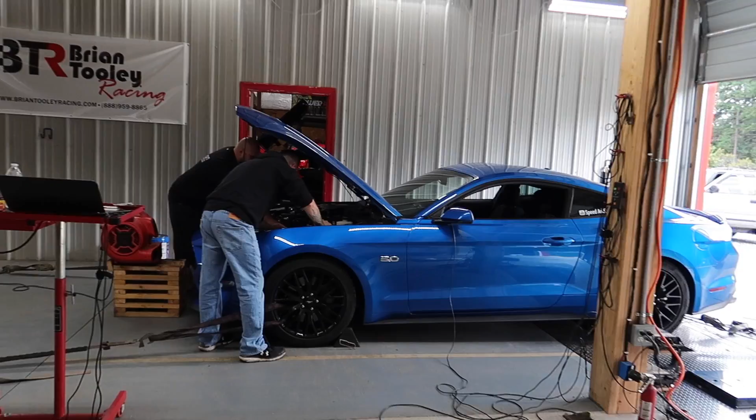We have it strapped to the dyno. I kind of left you guys in limbo in the last video with the to be continued again, but we are here at the dyno. This is actually the same day we got it running. We got the preliminary data logs done and everything's looking good. So now we've got it on the dyno, we got it strapped down, and we're getting ready to go. I'm going to change that exhaust.

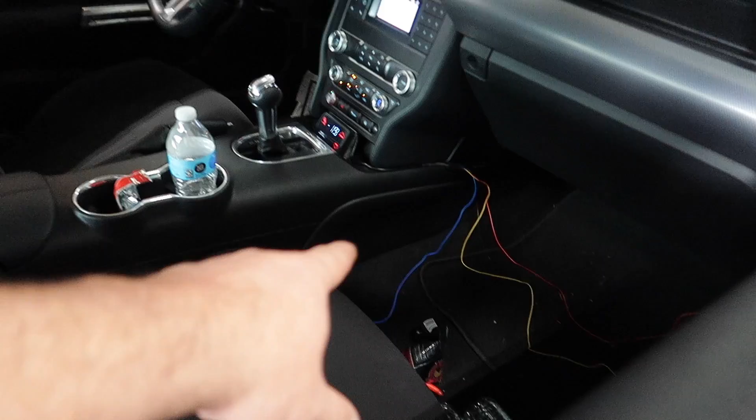As soon as I get it to the shop this week, we're going to be modifying that and moving it in, getting that taken care of. This right here is temporary, so if you see it today, I just got it wired up temporarily because I could not find a circuit add-a-fuse deal. Luckily Xander found one for me and brought it to me. Everywhere I went in Jackson I could not find one, but I got it temporarily in there so it will work, so we can do everything. We can adjust the boost today.

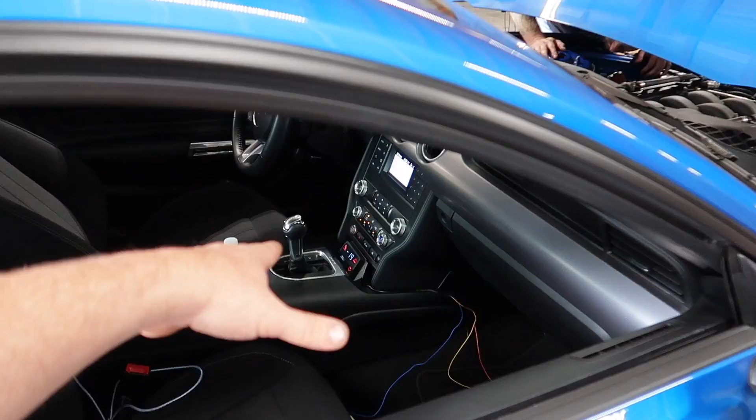All right guys, so we are about to do our first dyno pull. It's our initial dyno pull, and then Rob will take a look at it and we will adjust as we need to. This right here, I'll start the log for you, that way you ain't gotta worry about it. So I think 2500 to 6500. He only wants to go to 6500. All right guys, so we're only going to 6500. Don't expect no massive horsepower numbers. We're just filling it out. He's looking at the tune.

Do what? You want 1-to-1 gear or you want 6th gear? 6th gear. Rob said 6. Okay. This is 3.15 gears. 1-to-1, you'll be stupid mile per hour on here. Okay. Yeah.

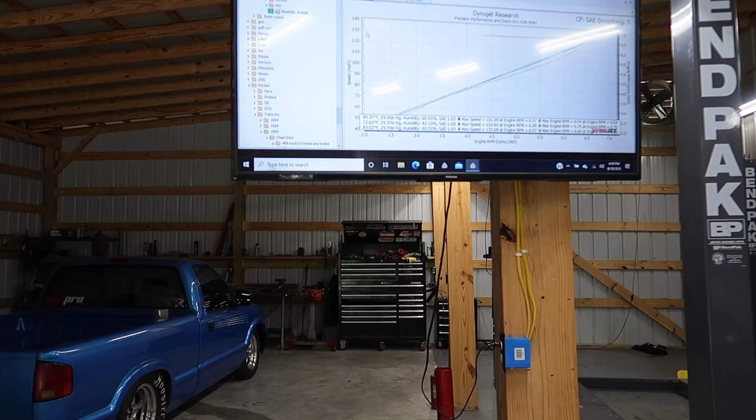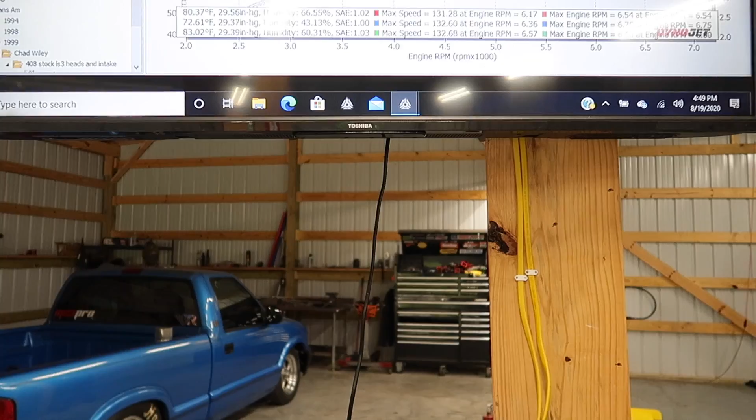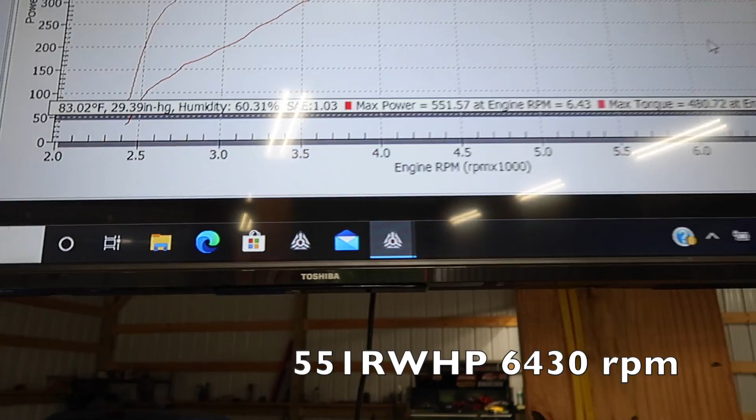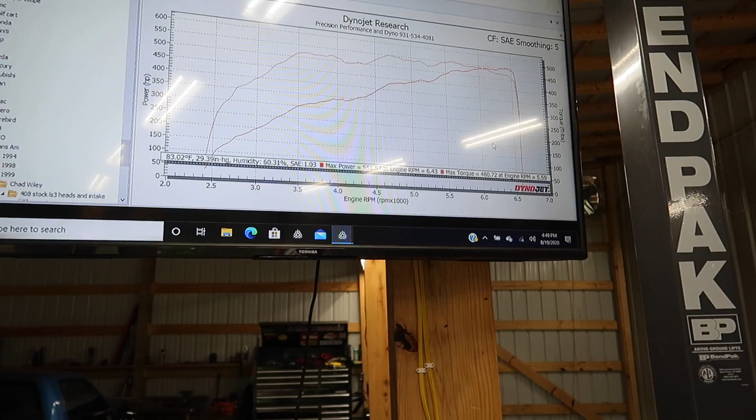Okay guys, so let's see what it does. It's doing its thing. This is a Dynojet dyno. Didn't rev out, only to 6500. 5.4 pounds. 551 and 480 torque. That's on 5.4 pounds. We gotta look at that and make sure we're good. That's not bad for 5 pounds, bro. Yeah, but we should be at 7. So it's something we gotta look at.

Alright guys, now we're going to take it to 7500. We changed some stuff in the boost controller settings. Still on wastegate, so we're going to see what it does.

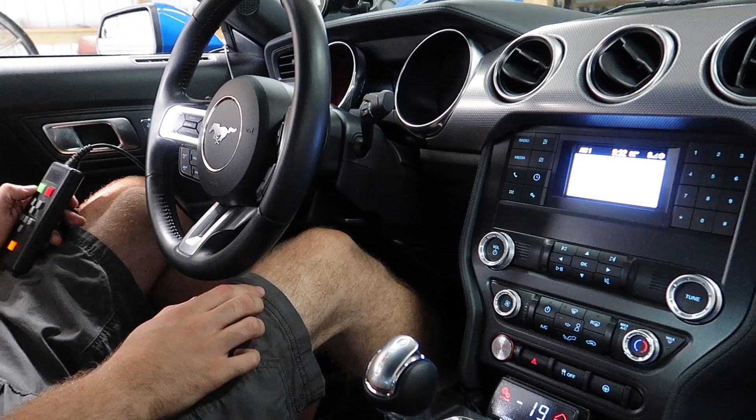What was that? Alright guys, so we're gonna jump in here and watch the boost controller. Talked to a couple people. One, the actual fabricator of the kit, and he said that what we're experiencing is pretty normal, that wastegate springs can vary and other things can vary, but the data log looked good. It was actually adding timing. So now we're gonna see exactly what it puts down. We upped the duty cycle. That was on 5.5 pounds of boost. We did 560 horsepower on 5.5 pounds of boost with 18 degrees of timing, and it was adding 2.5 degrees of timing. It was loving it. Shell 93, no additive. Yeah.

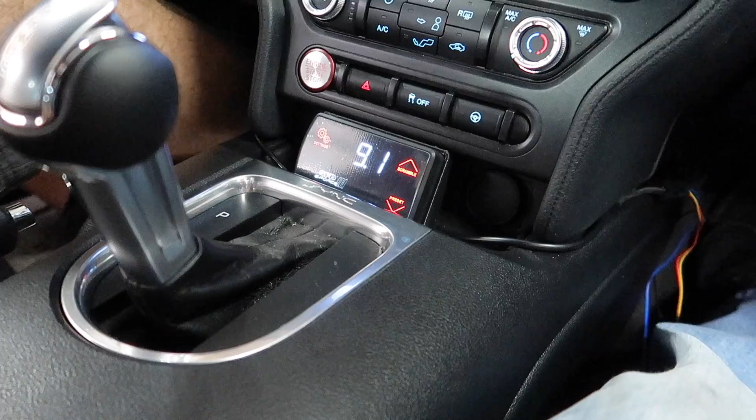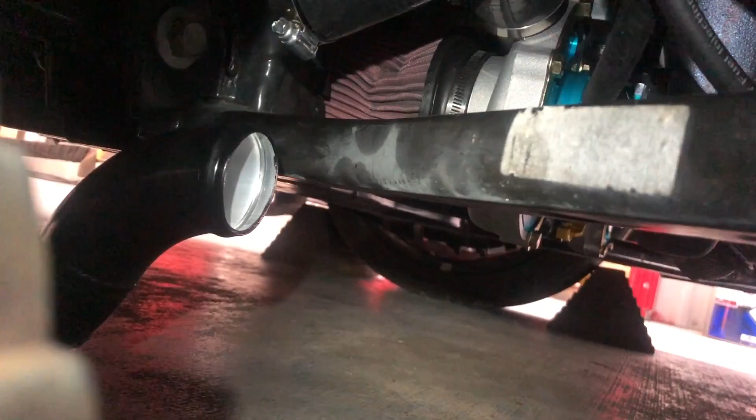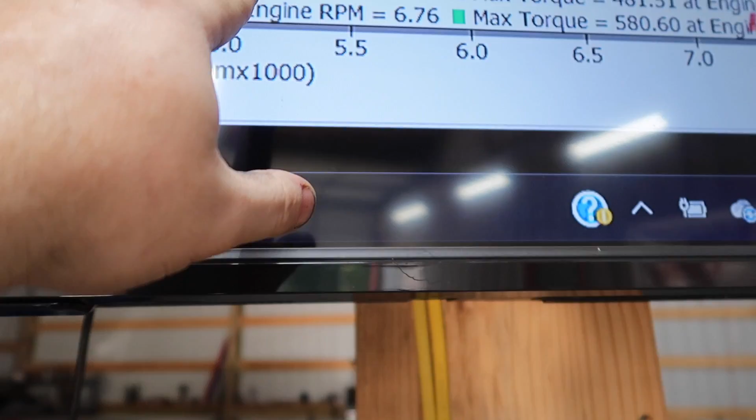We blow something off? Alright guys, so what happened that run? We hit 9.8 pounds and we blew that off. So now we're gonna fix it and then go again. I'll catch you in a minute. So that time we actually put down 686 horsepower at 6,700 RPM before we blew the coupler off. That's a little over 9 pounds of boost, 686. So we were gonna make 700 horsepower that time.

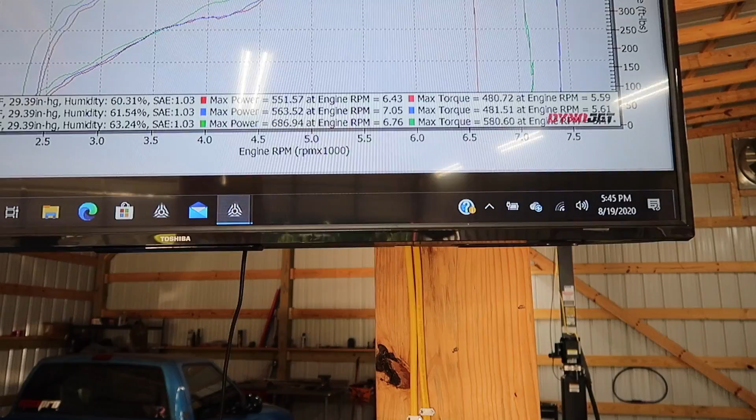So 750 and I'm good, I promise you, on 93. No. Yeah, 900 on 93. Do it. Come on, do it. Please.

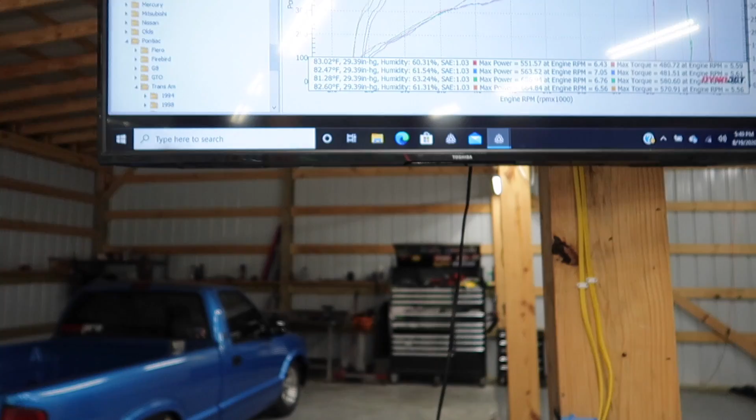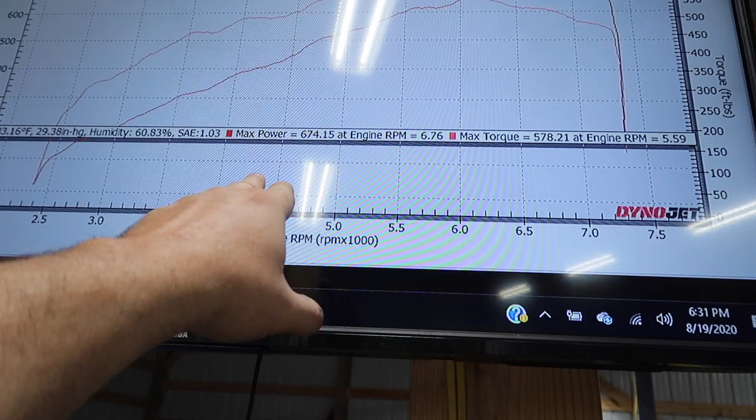All right, guys, so we're gonna make another hit. 664 at 570. So we're going to send the log to Rob. So guys, that last run we did 674, 578 torque, 9 pounds of boost, 93 octane only, no fuel additive. So not too shabby. E85, gotta happen.

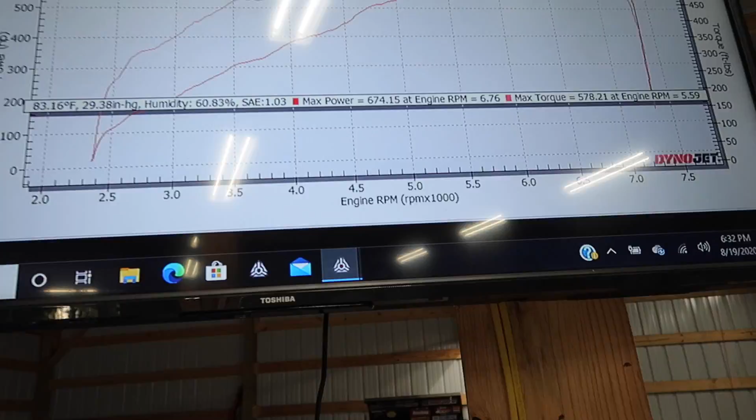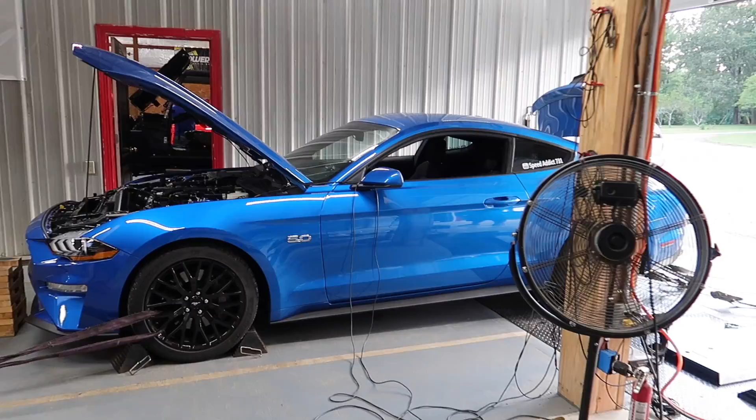All right guys, so we're getting ready to up the boost a little bit. This might be the final push. Like I said, 750, that's all I need on 93. Don't need nothing more than that. We're not trying to break records for 93 octane. Sorry, we're just not. As long as the car is happy, that's all I care about right now. All right, so we turned it up, per instructions from Rob, and we're gonna see what happens, guys. Hopefully everything goes good.

What'd it do? How much boost was that? 13.2. Nuh-uh. 13.2. We didn't need that much boost. That was a little more boost than what we wanted. Guys, that was 13.2 pounds. We didn't intend to go 13.2 pounds. However, look at that. 746 and 624 torque at 6,490 RPM.

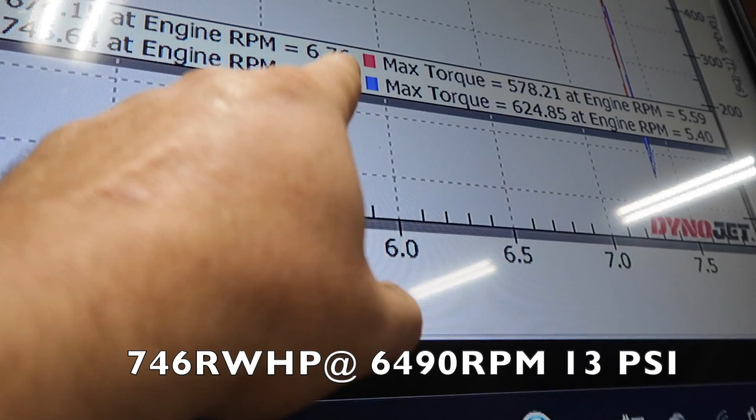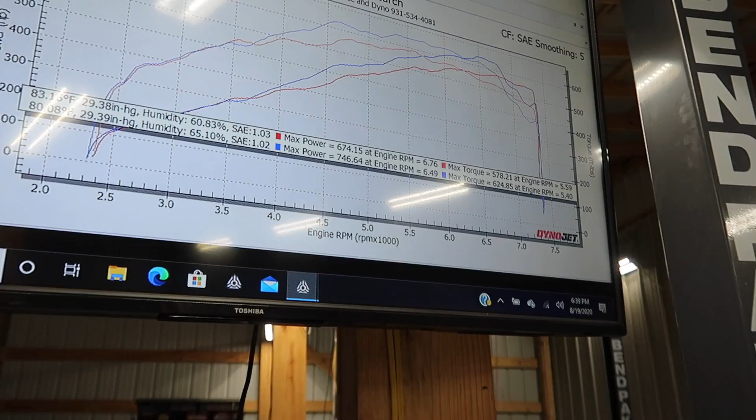They let off early. So it wasn't the 7,700 rev out like Rob wanted, but it was a little hiccup, so they want to see what's going on. So we're going to send Rob the log, and we're going to see exactly what it was doing. But that was 13.2 pounds, a little over my comfort zone for 93.

Xander, no. You don't want to run 13 on E85. That's 93. I know. So we're going to pull it back down. Let him look at the log. Yeah, but we're going to pull it. We don't want to run that. That's a pretty good number. Yeah, but okay.

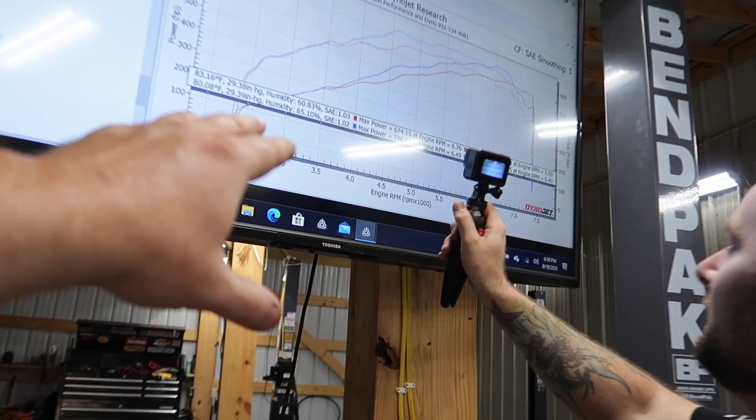So if you look at this, if we turn the boost down a little bit and they're able to rev it out, it'll probably be the same. Yes, that is correct. And it's safer. It is safer. Yeah. I do not want to be popping an engine. Number one, I love this car too much. I'm enjoying it too much.

So, all right, guys. So we did not really intend to hit 13 pounds, but however, we made 746 SAE on 93 octane. Remember I said 700, 750, but however, we want to do it cleanly. So we dropped the boost down, and we're trying to dial it in right now. That way, when I run down a drag strip on the max boost on 93, I know the settings to go to, and everything's happy. And then, of course, we can do wastegate up to that at any given time also, which is why I love turbo. Here we go, guys.

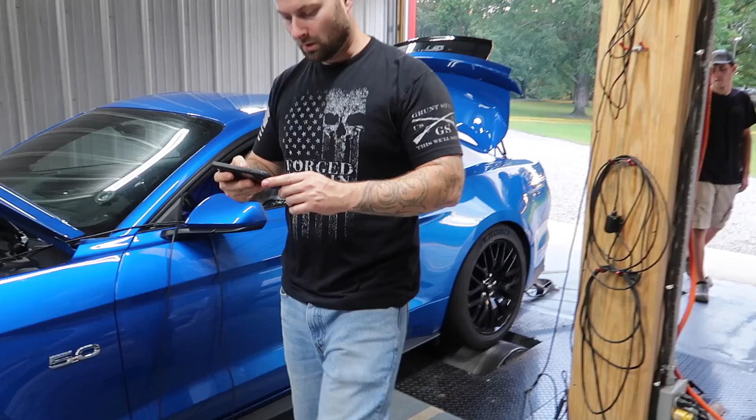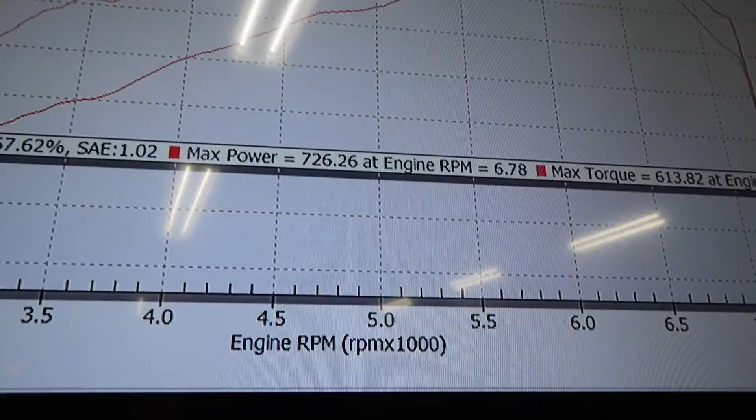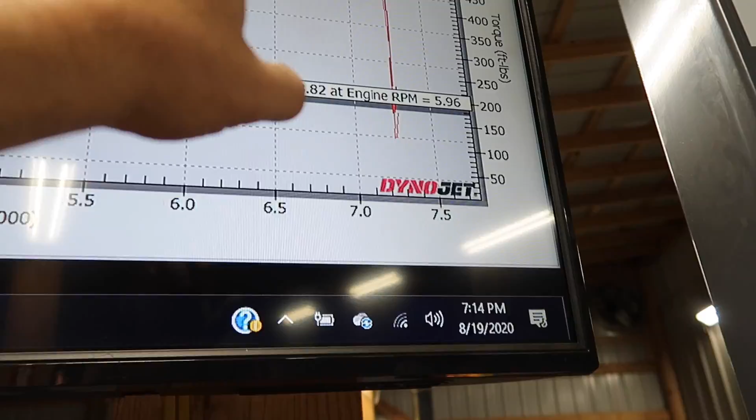11.4. All right, guys, we're going to SAE. Okay, 726 SAE and 11.3 pounds of boost. We made 726 at 11.3 pounds of boost. Remember, we only made 746 with 13 pounds of boost. So it did break up a little bit at the big end, so we're going to figure that out and see what's going on and get that addressed.

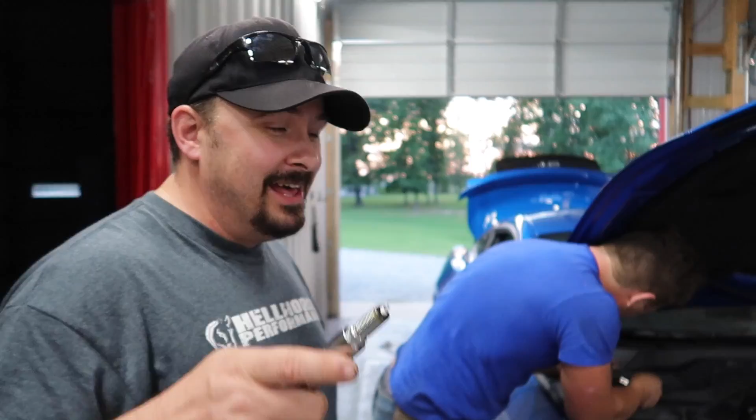Alright, guys, so we regapped the spark plugs. So we're going to make another hit. We're thinking it's spark blowout, the way the plugs look. We're thinking that's the case. Now we're going to run that same run at 11.5 pounds, and we're going to see what we make, run it all the way out to 7,700, and then we're going to bring it up till we find the ceiling, and then we're done. All right, Daryl is getting in. He is logging with his computer for Rob, so you're having a lot of fun today, huh, guys?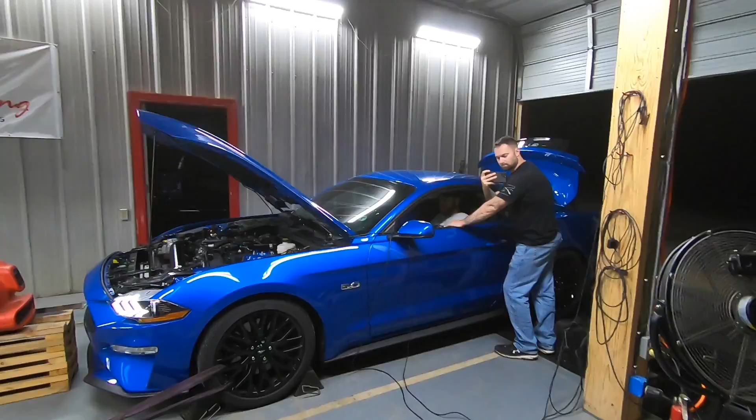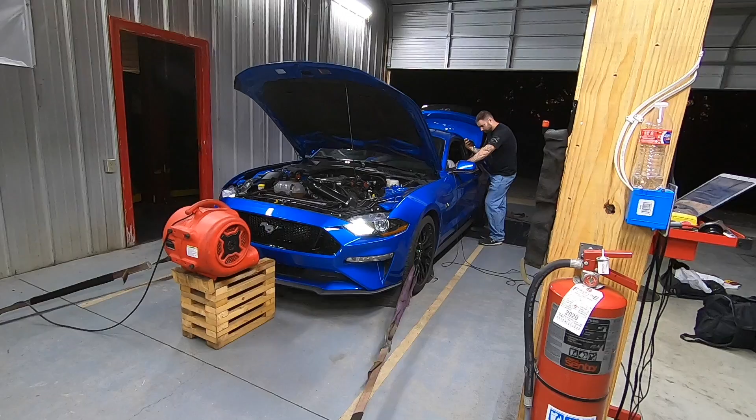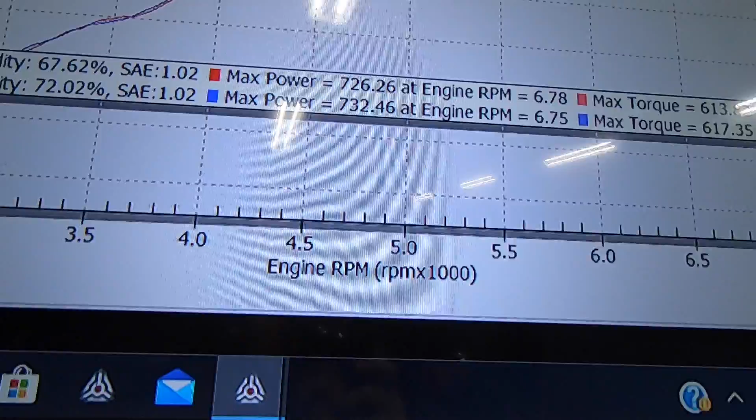All right, so here we go, guys. Same exact boost that we made 720. Regapped the spark plugs, hoping that was spark blowout we were experiencing. It really sounded like it. So we're going to see, guys. Here we go. So we made 732 that time, 617 torque. It's 11.8. 11.8? Yeah. Okay. All right, guys, so we're going back to wastegate pressure and doing a run just to see what it does.

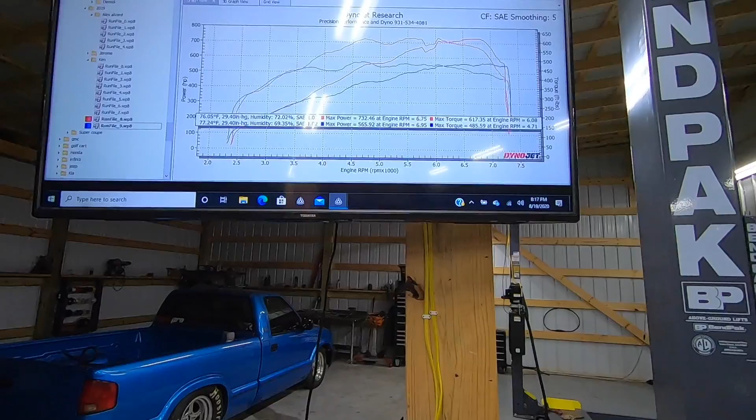.6, 5.8, that's about right. You know, wastegate springs can differ more and more. 565, what did it do in the beginning? 565 horsepower, I believe close to the same, I can't remember, I have to watch the beginning of the video myself.

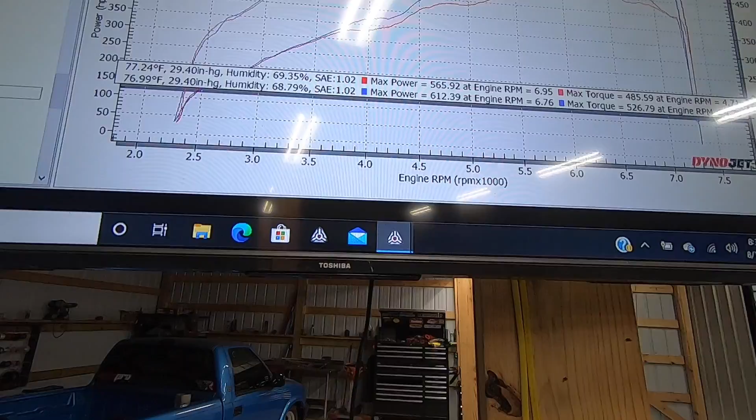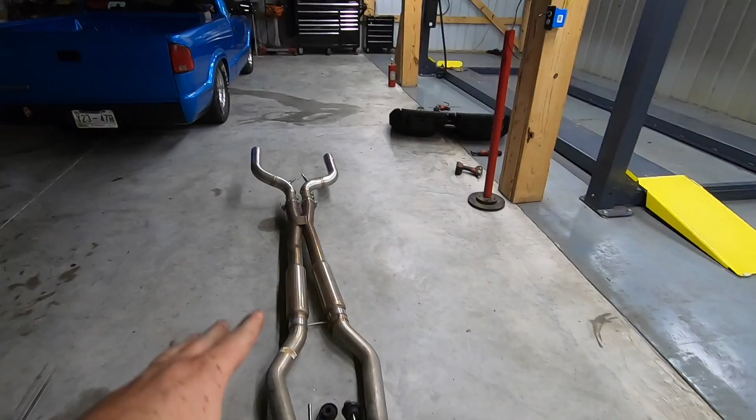So at 7 pounds, we're making 612 horsepower, 526 torque. So we're gonna let Rob look at this, see what he says. All right, so Rob and Jeff suggested to drop my exhaust. And okay, this is the exact same run we did last time. So we're still only at like 7 pounds of boost.

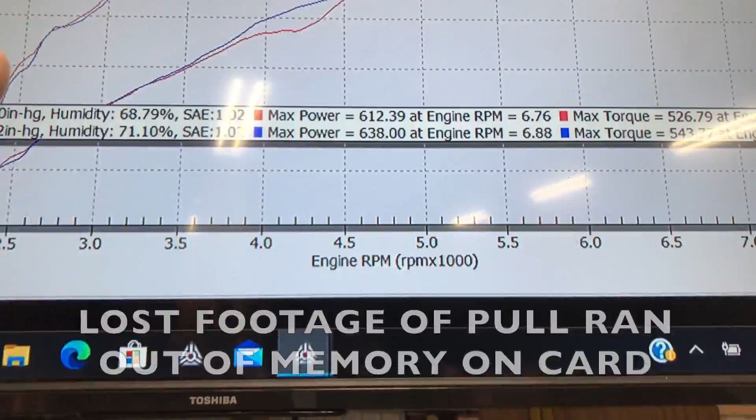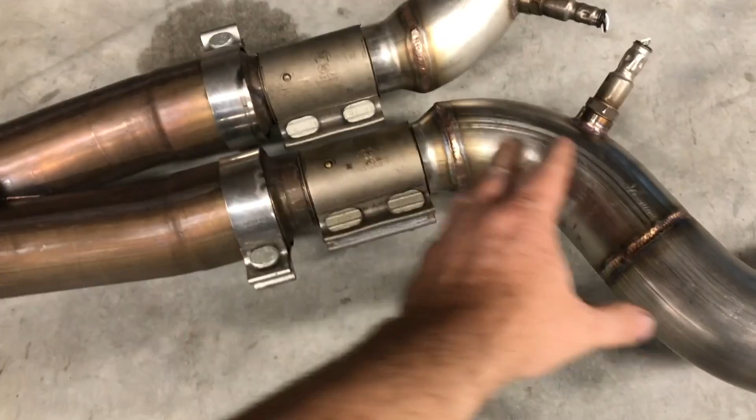All right, guys. So the bottom, the red, is the run that we made before we dropped the exhaust. The blue is the run that we just made. This right here is about 70 horsepower difference. I haven't had a chance to get to the muffler shop since I've had this done. This right here on the pipe will pop out. I have to get the muffler shop to put 3-inch out to about right here so I can slide it in and it'd be a full 3-inch right here. That bottleneck is hurting. So back pressure is a real thing.

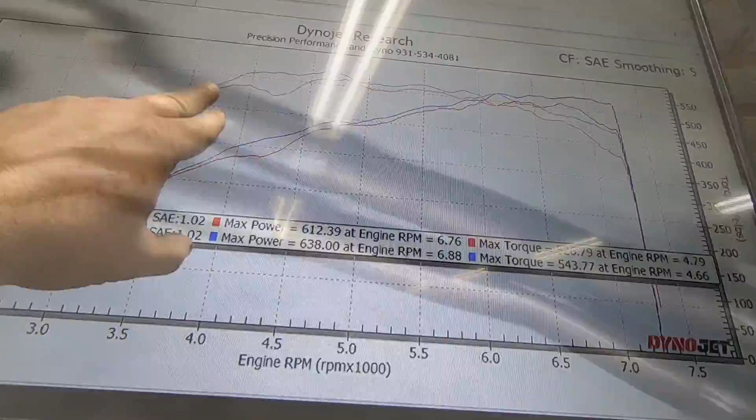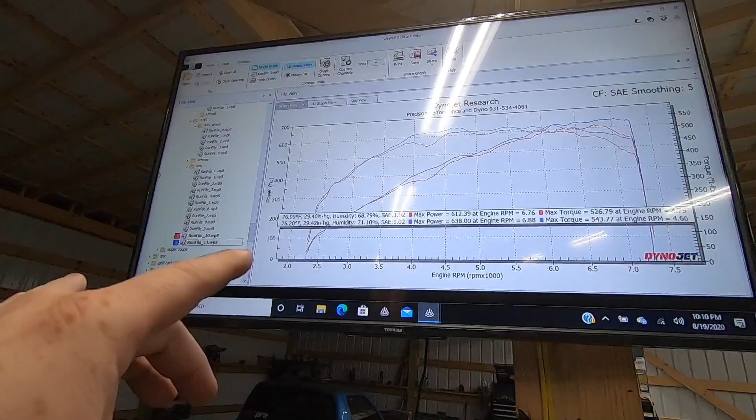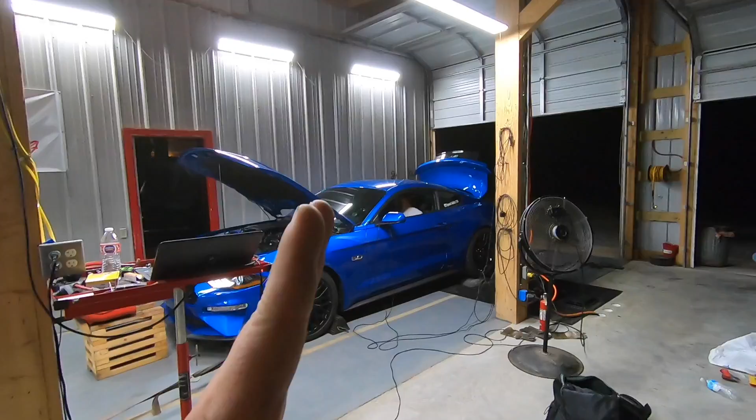We're not sure if we're gonna get rid of it when we turn the boost up top, but we were trying to get rid of those dips. 70 horsepower in that dip, but 612 to 638 horsepower. So now we're gonna turn it up and see if we have a problem on the big end turned up. So I'm gonna get this log sent to Rob, let him look at it, and then we'll go from there. All right, so this is 80% duty cycle. So we're gonna see if we have any problems in the higher RPM breaking up like we did earlier. This should be about 11, 12 pounds of boost.

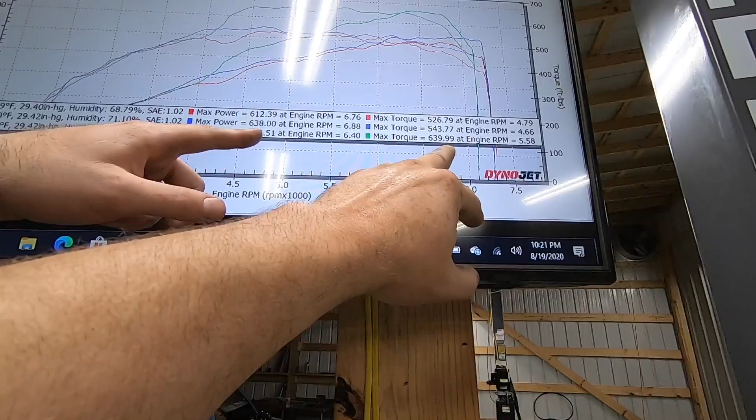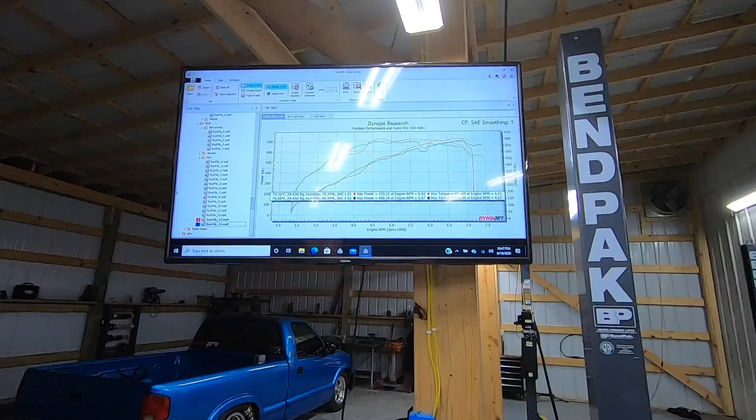That thing's loud. 13.1. Huh? 13.1. 13? We didn't mean to go to 13. Yeah, 13.1. 764 horsepower. Look at the 639. 639. Impressive. So we're gonna drop that down a little bit. So 700, might as well say 700 horsepower. So we made everything from 760 something to, yeah.